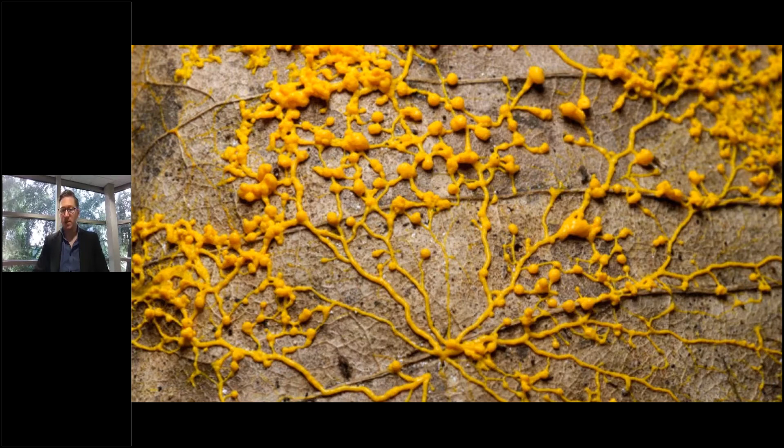Having been adapted to cities around the world and now offering the potential for mimicking regularly occurring events such as rush hour, this slime mold is a single cell organism which grows outward from a single point, searching for food sources along the way. Once these have been located, the many branches it has sent out die back, leaving only the most efficient routes between the food source nodes.

By arranging pieces of oatmeal on a petri dish to represent railway stations, researchers at the University of Hokkaido in Japan successfully grew a slime mold of the Tokyo railway system in 2010. Since then, the slime has mapped the optimum transportation networks for numerous cities. As the knowledge base grows and information is shared, this algorithm that was developed by using a slime mold, of all things, will help inform better decision making, not only across the United States, but also the world.

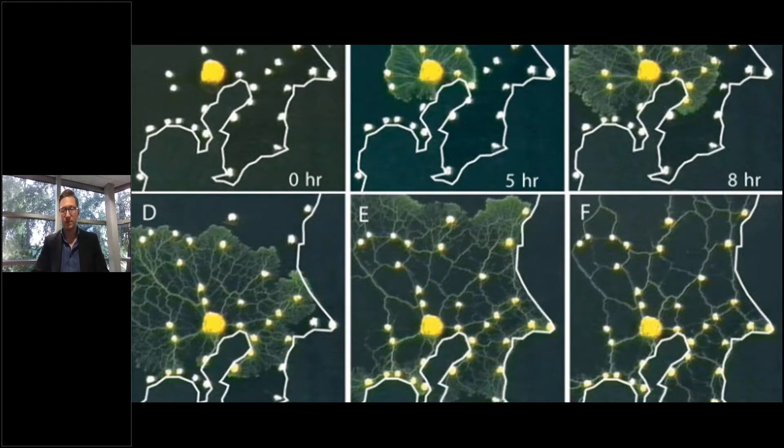Now, the second example I'd like to talk about is nature's ability to form symbiotic partnerships. Nature uses partnerships or relationships to vastly and often rapidly increase adaptability. One interesting example of this is sea crabs carrying sea urchins as they move.

This is mutually beneficial for both parties. The sea urchin benefits because they are oftentimes moved to new areas with higher density food sources, but from a crab's point of view, it's great to have friends who can protect you.

Most recently, this same sort of relationship can be seen in restaurants' ability to adapt to food delivery systems. An existing network of flexible delivery systems has helped local restaurants and shops connect with customers outside of downtowns, maintaining connections and continuing sales. The virtual network that made this happen is one thing, and is honestly something I can't even begin to understand. But the physical space that allows this to happen is something we can work to understand and design better.

A location where vehicles could quickly pick up a package for delivery and head out to its destination, possibly resulting in a more convenient rapid pickup location shared by multiple restaurants. How can further development of these symbiotic relationships inform solutions on the street that we can begin to implement?

The last example I'd like to reference is probably more relevant now than ever. Nature uses redundancies and diversity to harness adaptability in times of crisis. One of nature's best examples of this can be seen in the prairie ecosystem. The prairie ecosystem has a diversity of plant species that serve different functions in the ecosystem, such as nitrogen fixation, water retention, and soil stabilization.

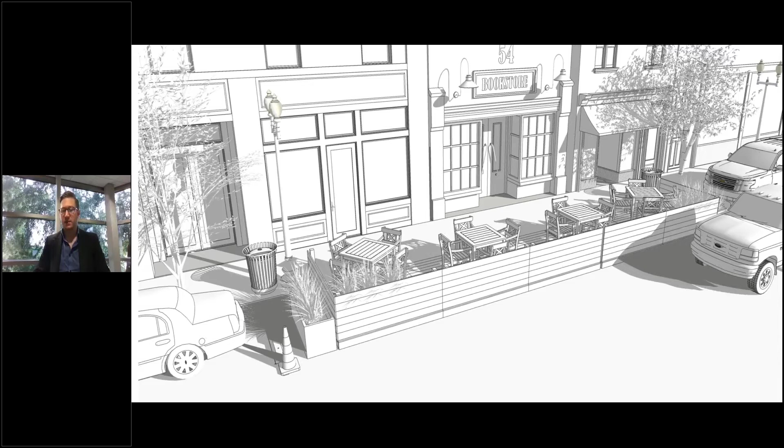We have over the last few months begun to devalue the single parking stall in favor of certain improvements. What we are seeing in many forms is the idea of a flexible zone, where certain adaptations are free to happen. As we begin to think about these adaptations currently happening and how we can evolve this idea, we begin to think about what alternate forms of installation we can look at. Outdoor dining is great, but how can we layer on uses?

Working with a local company here in Eau Claire, we are in the process of developing solar modules that function as outdoor seating, but have the potential to provide charging for electric vehicles, lights, potentially even climate control. This could also be replicated to outdoor workstations where you have multiple connections for power and convenient amenities such as lighting and climate control as well.

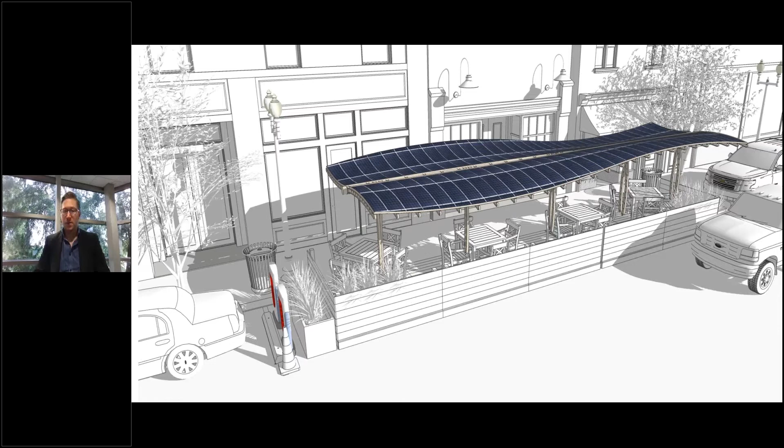We didn't stop there. We began to envision different forms of public spaces with hammock lounges, extended areas for shade to help reduce solar exposure, of course, and micro playgrounds. When we view this parking area with a different lens, the opportunities begin to surface and creative design has room to grow. How can we design in our streets the ability to adapt to times of crisis? How can we give our streets structured flexibility?

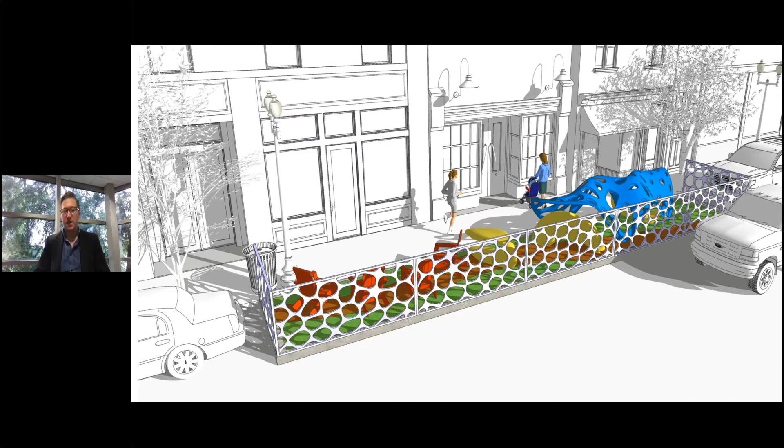Nature does not plan or try to be perfect. Nature adapts to solve problems in their environment. However, nature does learn from its successes. Positive reinforcement is a powerful thing. We need to never forget to stop and appreciate and learn from our current successes. But what can we learn from the change to help guide a more resilient and adaptable future? An adaptation where we can ensure that our communities have the tools and environment to not only survive, but thrive.

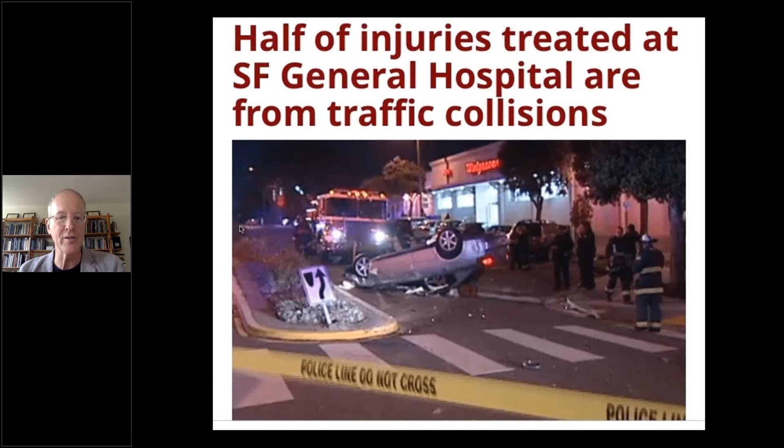Of course, we used to talk about crime when it came to safe streets. Now, speaking statistically and paying attention to what statistics tell us, it's really car crashes that are the principal cause of danger in our streets. And so that's what we're here to talk about.

Car crashes have declined and then kind of held steady - injuries and deaths from car crashes - over the years. But of course, we've been shocked to learn that pedestrian deaths have been rising steadily now for over a decade due to a number of factors we don't need to get into. Angie Schmitt talks about these in her new book, Right of Way. It's really become more and more dangerous to be a pedestrian in the US, and that's what I'm going to be focused on today.

One strategy, of course, is to blame the victim: try to walk defensively. Twitter has its fun with these issues, and wearing a bright outfit and making eye contact is all well and good. But really, there's a lot of things the pedestrian can't control, and I look at this picture and I'm reminded of a quote I recently read where DOTs are telling pedestrians it's really their responsibility to stay safe.

In fact, the principal responsibility for creating safety in the street falls to the street designer and the engineer, and it surrounds speed. A car moving twice as fast has four times the kinetic energy when it hits you, and a car going 35 is about 7 times as likely to kill you as a car going 25. So all the things we talk about when we talk about making streets safer have to do with speed. Well, not all of them, but it's really two things: speed, and protecting pedestrians and cyclists from vehicles.

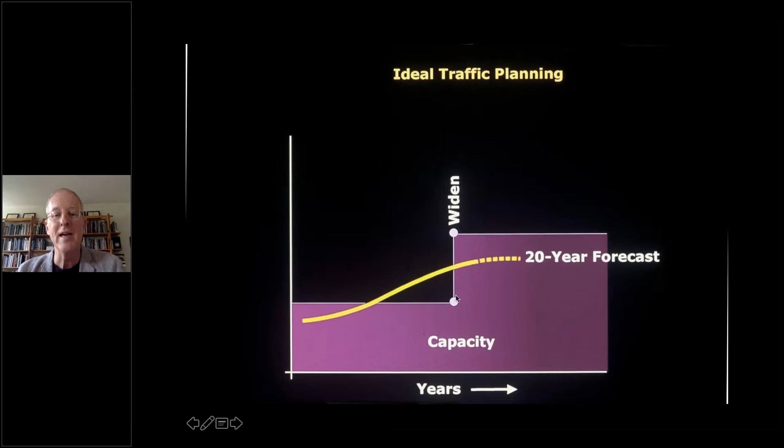And traffic studies presume what you see here, which is that you have a certain amount of capacity, you have a certain amount of trips in yellow. When the trips exceed the capacity, you get congestion, and you widen the street to absorb that congestion, and you no longer have a problem, which of course has never, ever happened.

And what we have in the US instead is what's called induced traffic, where there's a lot of trips that weren't being taken because the principal constraint to driving in congested places is congestion. And that's the operative sentence.

Now, if your city isn't congested, you might be able to increase some flow by widening a street. But in fact, if the street is congested, people who were not driving because of congestion, or who, for example in the American Midwest, typically were not commuting exactly during rush hour but perhaps a few minutes earlier or later, will change their behavior and the congestion comes back.

Today's engineers acknowledge, this is from Newsweek magazine maybe 15 years ago, today's engineers acknowledge that building new roads usually makes traffic worse. And I read this and jumped for joy, and then I landed and said, well, wait a minute, I'm doing 3 different projects where that isn't acknowledged.

And it's very typical that people will agree that induced demand happens, but in their day-to-day activity as a city planner or as an engineer, will ignore that knowledge.

Here's the study. It was presented at the London School of Economics, very straightforward. Actually, I have no idea what this means, but I do know what the conclusion means, which is that for every amount of new capacity that you add to a congested system, it will be 40% absorbed immediately, and within 4 years, on average, it will all be absorbed by new trips that it generates. Or sometimes it will be absorbed immediately by new trips, like the $1 billion expansion of the 405 freeway in LA.

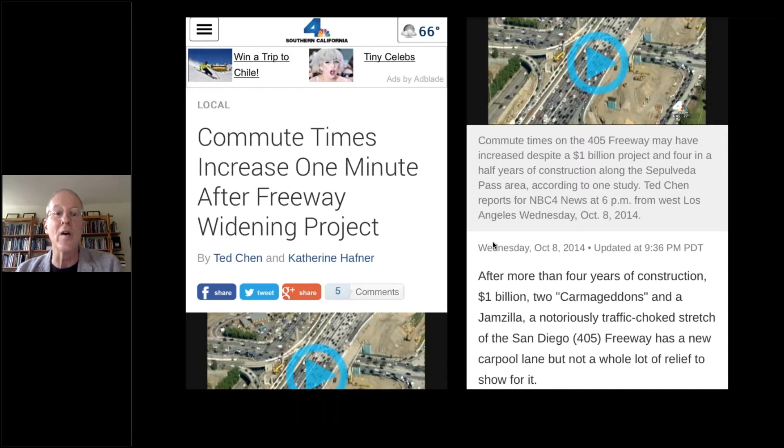I share this discussion wherever I go because it just bothers me so much that people ignore it. But then I usually move on because it's a hard argument to win. And I ask a different question instead, which is, let's look at your downtown streets and see if you have some streets that aren't congested, if you have streets that have more lanes than they need.

Obviously, the more lanes you've got, the faster cars go, the further pedestrians have to cross, the more opportunities there are for lane switching conflicts.

This was Oklahoma City, which about 10 years ago, Prevention Magazine named the least pedestrian-friendly city in America. In fact, the worst city for pedestrians in the entire country was Oklahoma City. And the mayor came to me and said, what do we do?

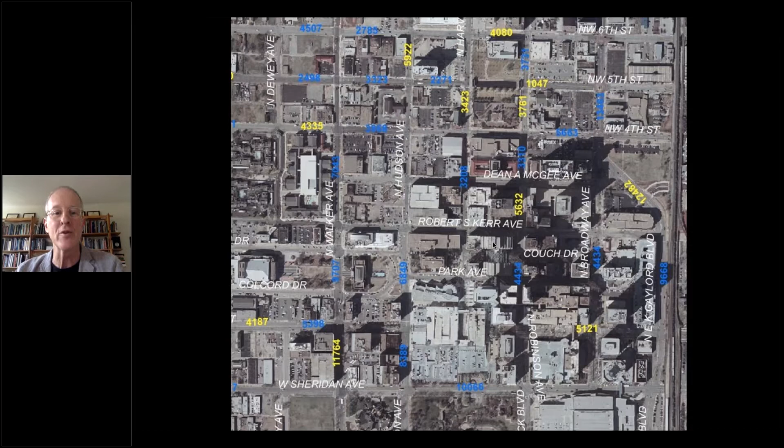I said, let's look at your car counts and your number of lanes. We know that a 2-lane road will handle 10,000 cars per day without turn lanes. These were the car counts in downtown Oklahoma City, and these were all designated to be 4-lane, 5-lane, 6-lane streets with these minuscule car counts.

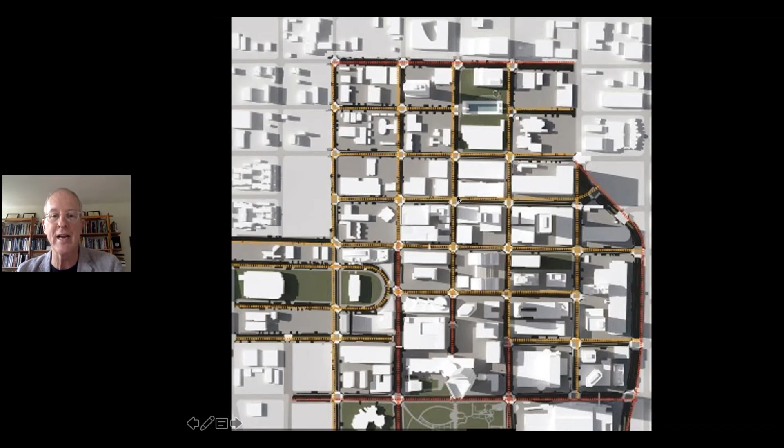So we did a plan. Coincidentally, this new building at the south here, Devon Tower, was about to land, generating $200 million in tax increment. And we decided to spend that money rebuilding all the streets in the 40 block downtown core.

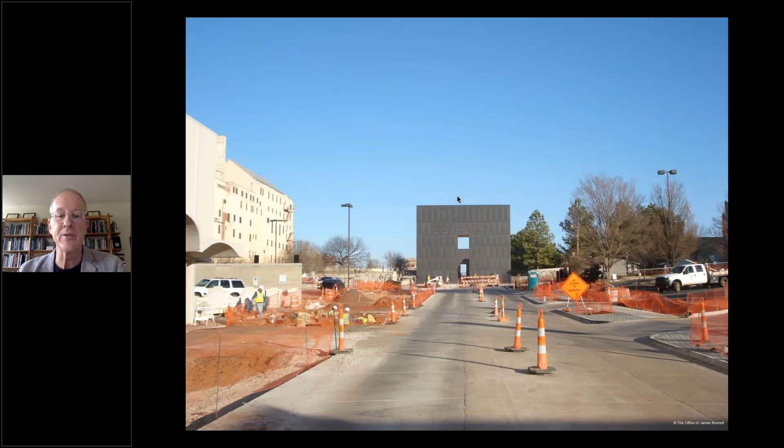My job was to design the curb to curb. A typical street went from this to this. We right-sized them for the amount of traffic they had. Here it is under construction, not congestion. Here's another street, Sheridan, through the heart of downtown, became this.

This is what you do if you have money. I always say, if you've got 200 million to spend, rebuild. If you don't, you can restripe a whole downtown for the price of rebuilding just a few streets. That's more the strategy we've been using in lots of other cities.

Here's something you may have seen before. It's called the Classic American Road Diet. If your city has 4-lane roads, these are inherently extraordinarily dangerous. The Classic American Road Diet turns a 4-lane road into a 3-lane road. We've been doing these all over the country.

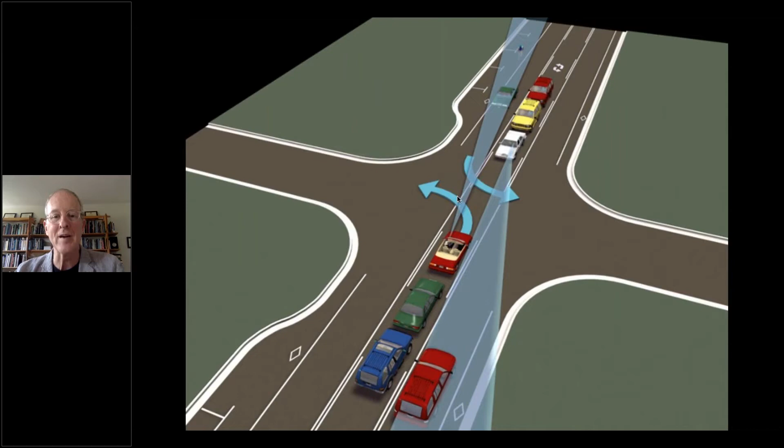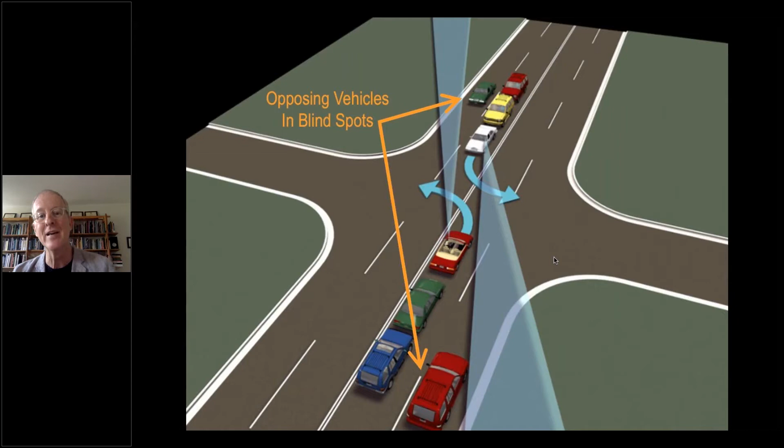Jeff, you're breaking up just a little bit there. I just wanted to bring that to your attention so you could increase some bandwidth if you have that ability on your end. Great, I'm going to turn off my camera. Hang on for a second and wait for one second more. Can you hear me all right? Yes, I can hear you now, Jeff. Great, thank you.

So one-way streets, I won't repeat, but they're inherently dangerous, principally because whatever lane you're in, the other lane is faster. And you have this opportunity when there's multiple lanes in one direction to jockey. So there's the story of Vancouver, Washington, which famously brought its one-way downtown back to life by making it 2-way, which was, of course, a long time battle with the state DOT, and we often have to work with and against DOTs to accomplish these.

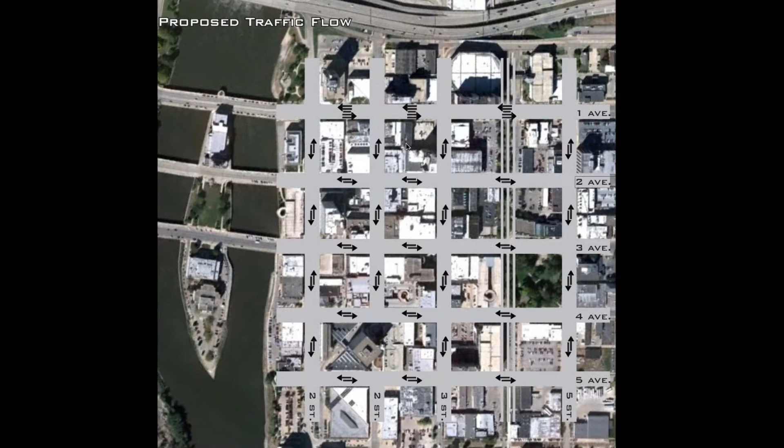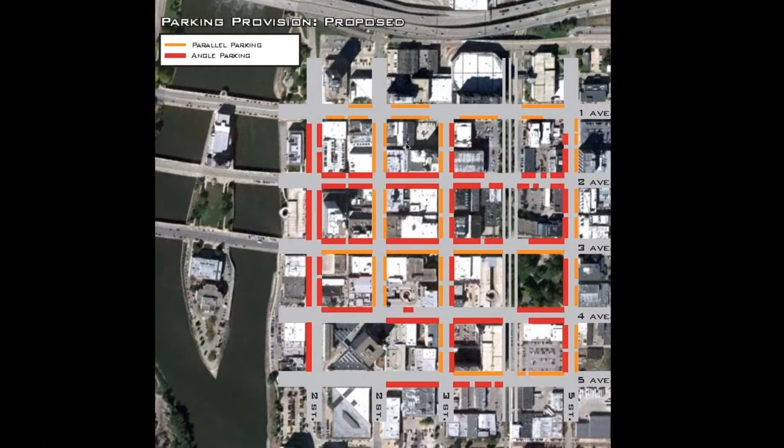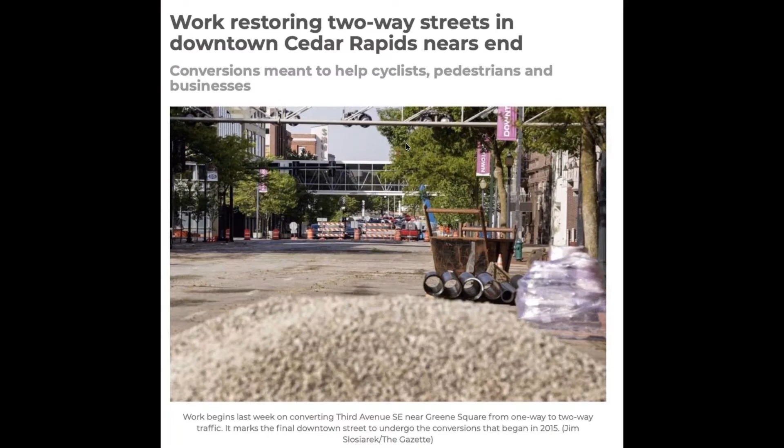And written about, the downtown core is the part you see here. You can see where the conversions occurred. Here's a typical street before and after.

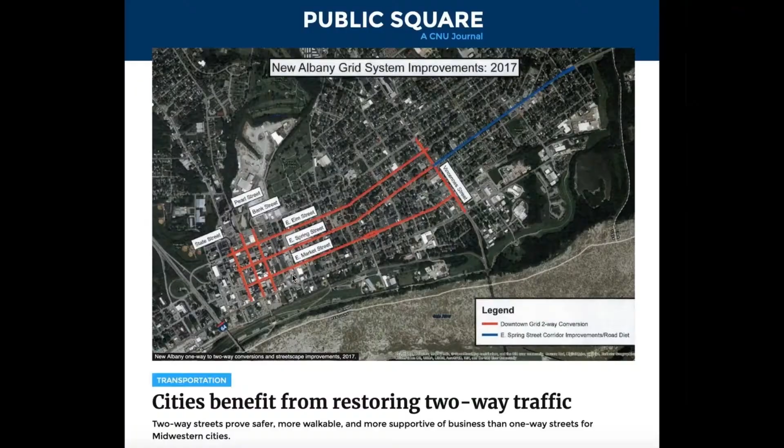This guy over here on the left is still learning how to use a parking space next to a protected bike lane. Wonderfully covered in a great publication called Public Square, which will be represented by the next speaker, who you will enjoy immensely, Rob Steuteville.

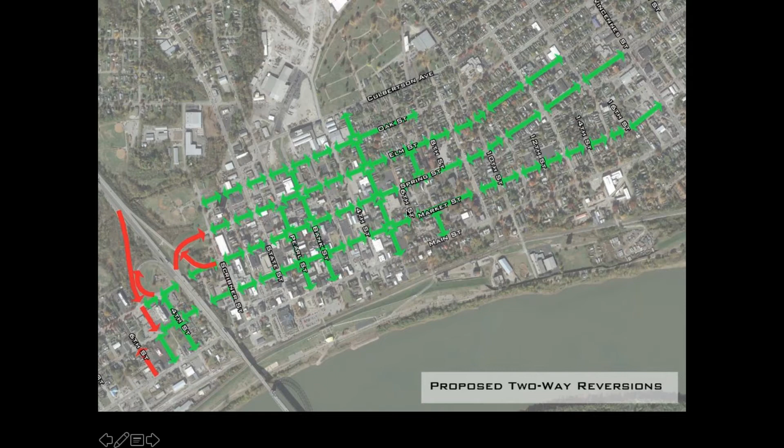He also covered in this article what we did in New Albany, Indiana, across the river from Louisville, where we designed the two-waying of all these streets. In fact, the neighbors had to fight for it. It took 3 years, and they did them all in one summer. According to the police chief, he's never seen a better scenario for public safety. So that's a big help.

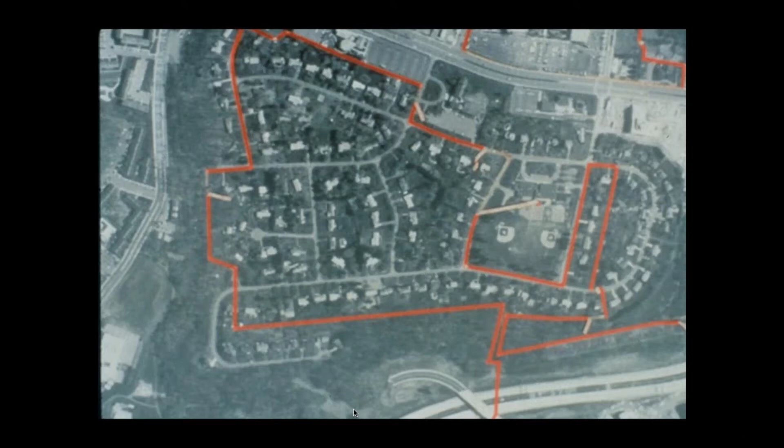The width of the streets next. The typical street in America has gotten wider and wider over the years, from 1960 to 1980, same height of airplane, different subdivisions. You see how the standards have shifted, such that in my old neighborhood in Miami, we had to lose half our sidewalk because the street wasn't draining properly, and they rebuilt it to the new standard. Wider streets, people go faster.

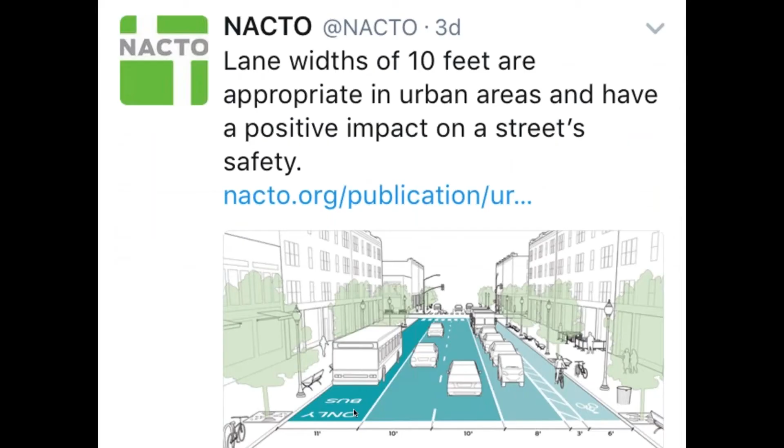We have the data. NACTO has now identified that the standard 10-foot lane for an urban, busy, mixed-use through street is the standard again. Many cities have slipped to 11 and 12 over the years, and we're now going back to 10, which is much safer.

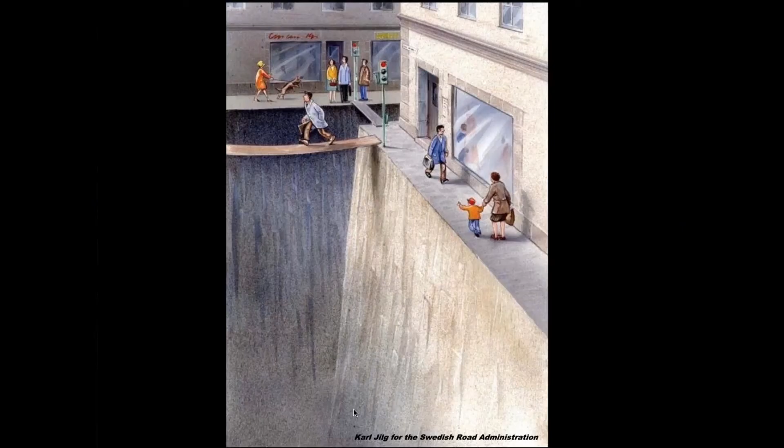This is an artist's interpretation of how a street feels without the parallel parking, without the street trees. Little details like corner curb radii that cause cars to stop before they turn or not, and cause pedestrians to walk vast distances across intersections or not.

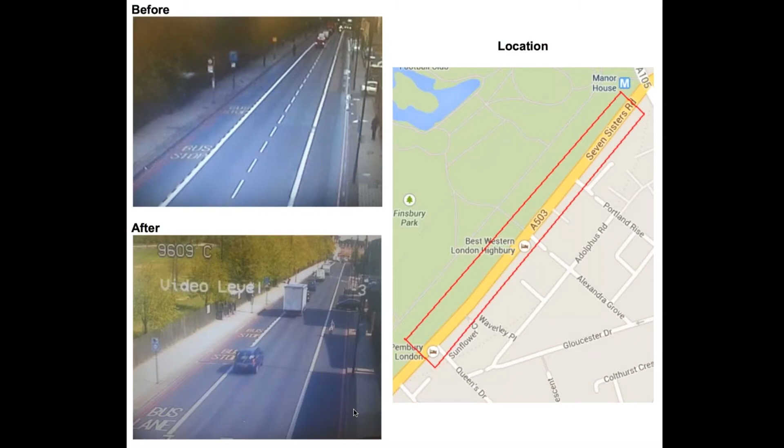And then recently discovered in England, but now we're applying it here in the US: when you remove the center line from a two-way street, the fear that evokes in drivers—that they're perhaps not driving in the right part of the street, whether it's the left side or the right, depending on where you are—causes speeds to drop an average of 7 miles an hour. So that's a trick we're applying to many streets, removing the center lines.

Signals make intersections more dangerous than all-way stop signs. In Philadelphia, signals were removed and replaced by all-way stop signs on 472 intersections. We collected data on 199 of them. Crashes dropped, injury crashes dropped, and severe pedestrian injury crashes dropped by more than two-thirds. The engineers there believe that it's only in Philadelphia where people speed up at yellow lights.

But what's important to understand about a stop sign is that no one ever legally goes through it at any speed, right? And of course, everyone sees everyone else—there's eye contact being made. Wheelchairs are safer, bikes are safer.

So for the right kind of intersection, many cities have signals when they shouldn't. They should have four-way stops instead. And when I work in a city, we typically turn a lot of signals back into stop signs.

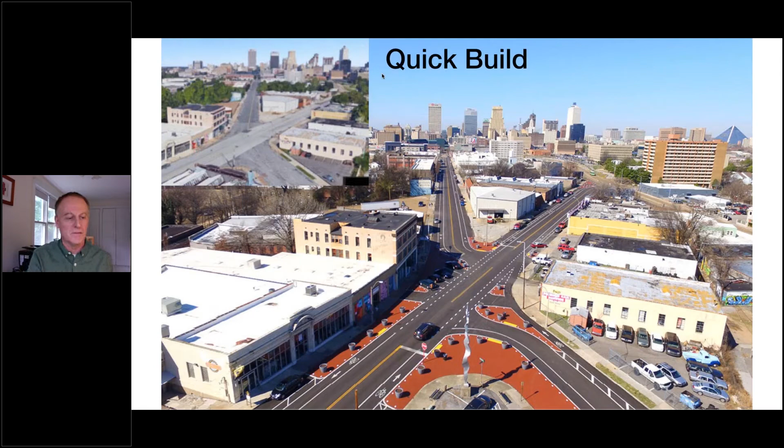The quick build is a semi-permanent methodology. The projects tend to last, or are expected to last, 5 to 8 years, maybe 10. So it's a trade-off of longevity for immediate impact.

The process is quick because the pavement doesn't change. There's no stormwater impact, there's no topographical survey. The engineers and designers who are implementing these changes are learning a great deal about materials—which ones last the longest, and which ones can last through the weather and the seasons.

You can adjust these projects if they're not working out as planned, or even change them according to seasons. In Burlington, Vermont, a snowy place, they're using this quick build approach, and some materials like planters or bollards can be stored in the winter and reinstalled in the spring.

You can also implement quick build with a routine maintenance schedule, which allows you to apply new coatings and new designs to surfaces when streets are repaved.

Now I'm going to talk about a more permanent framework for changing streets. I call this the Florida model, and state DOTs have a huge impact on streets. Many of the complete streets projects depend on state funding, so it's really important that states understand and support complete streets. Florida DOT has created a framework and a model for building context-sensitive and walkable streets that other states may want to emulate.

You may be thinking, doesn't Florida have the most deadly streets for pedestrians in the US? And yes, it does. So why should we look to Florida for inspiration? If this new system can work to transform the thoroughfares in Florida, it can work anywhere, and it responds to context.

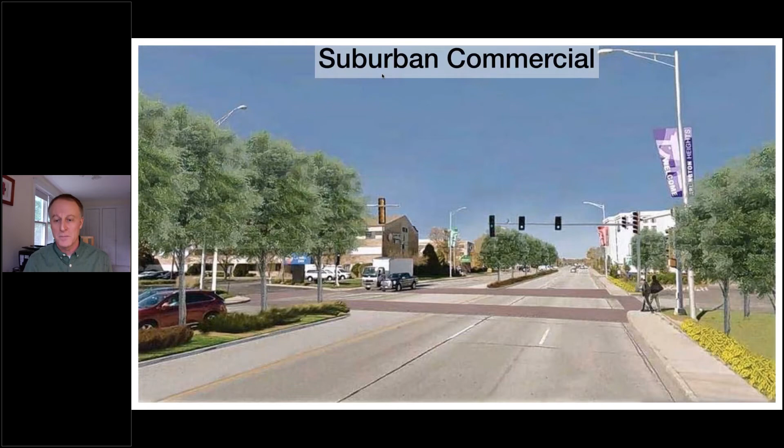This model calls for different designs according to context, such as urban core, urban center like a main street, urban general which is an urban neighborhood, suburban commercial, suburban residential, rural town, rural, and natural. So these 8 context zones cover the entire state, and they represent a new, common sense approach to street design for a state Department of Transportation.

Of the 8 context zones, 4 of them are walkable, which is 4 more than the DOT used to acknowledge. The first 3 are in cities, and the 4th is rural town, which is really an urban, walkable urban place. But rural towns don't like to be called urban, so they named it something that did not include the word urban in it.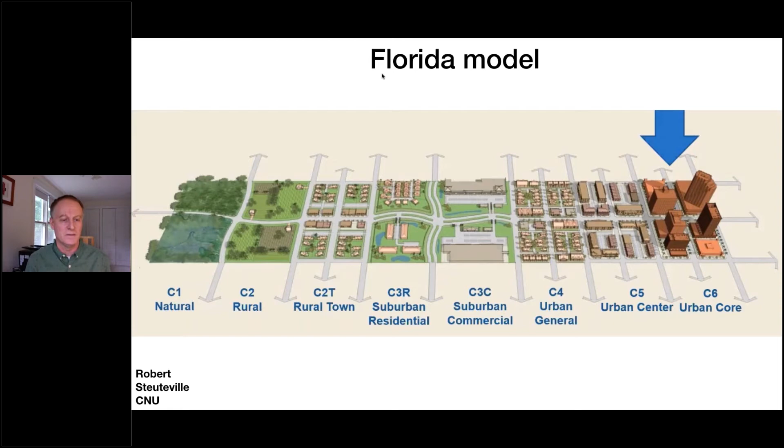So it's about building the right street at the right place, according to Billy Hattaway, who is currently the transportation director with the city of Orlando, but he was with the state DOT and he spearheaded this new context-sensitive approach. A direct result of reform is to change target design speeds.

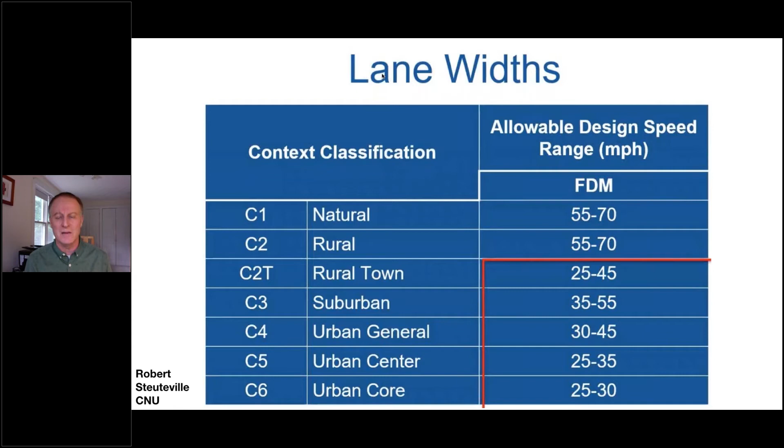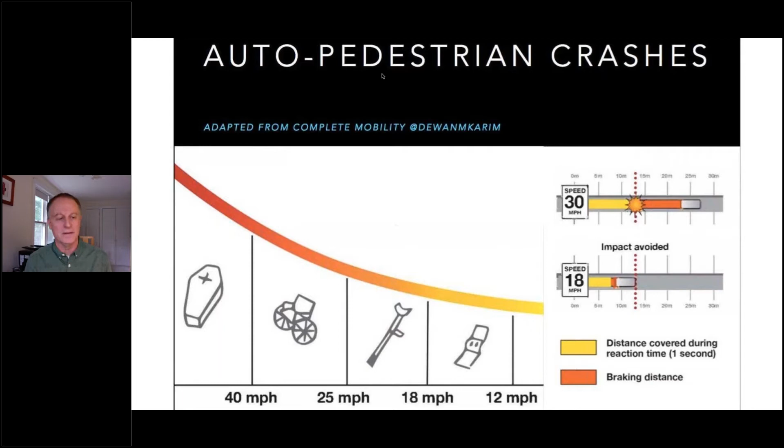Minimum design speeds, regardless of context, were previously 40 miles an hour. In 5 of the 7 context zones, Florida now allows lower design speeds. Reduced speeds in walkable context zones have a big impact on health and safety because fatalities and long-term injuries rise rapidly in car-pedestrian crashes above 20 miles an hour.

The system not only allows the state to design roads according to current context, but it allows for thoroughfares to be designed according to a future context that is planned. This is now a suburban rural area, but it is planned as an urban center. It's in Woodville, Florida. You really can't create an urban center without changing the infrastructure first, or at least concurrently with the development. You can't do the development first and the infrastructure later—that doesn't usually work out so well.

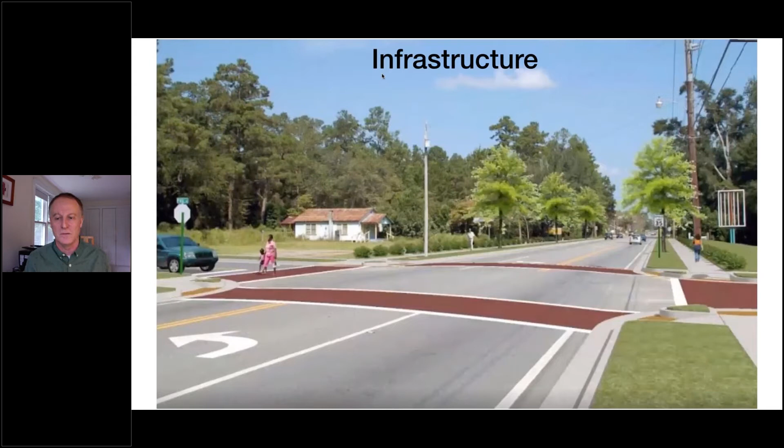So this is what it looks like if you just change the infrastructure and put in some walkable facilities. And if you put in the buildings and on-street parking, this is what it looks like. So the Florida model is the kind of theoretical framework change that we need in our major transportation institutions, based on proven design models that have worked for a long time, regardless of technology.

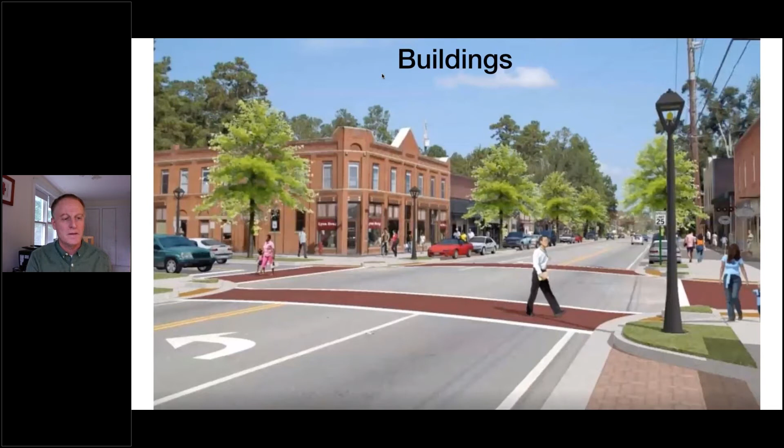Now I'm going to talk about the importance of suburban retrofit. And I'm going to take everybody out of the silo of streets for a couple of minutes, because it's important to see the wider context for complete streets.

But regardless of the short-term demand, there is a very important reason to pursue suburban retrofit in the long term. If you're not familiar with Chris Nelson at the University of Arizona, he's an eminent housing researcher—you should be. His research shows a huge mismatch between the housing we have and the housing we need all across the US in the next two decades.

This mismatch is due to changing demographics and preference, which don't line up with what was built in the last half of the 20th century, really up to 2008. And of course, street designers were a major driver of what was built during that time period. I won't go into details, but the bottom line is that we have way too many large-lot single-family houses, to the tune of tens of millions of units, and too few of the urban housing types.

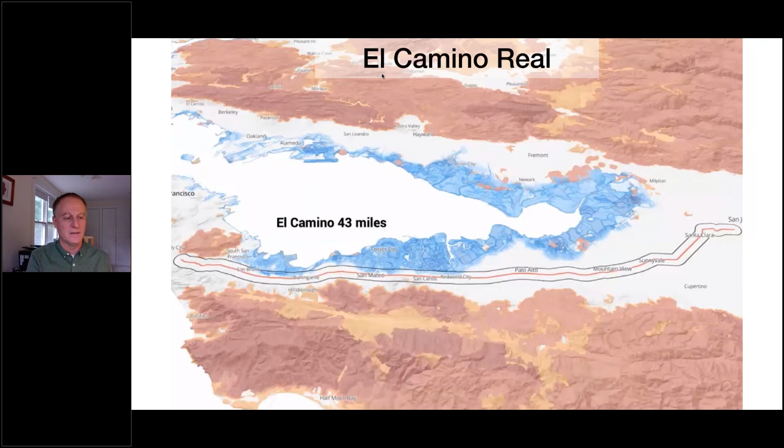If you take that right-of-way and reallocate it, you can fit that same six lanes of traffic plus bus rapid transit and generous bike lanes and sidewalks. The land adjacent to the right-of-way is also inefficiently used, and by looking parcel by parcel, they determined the thoroughfare could accommodate 250,000 new housing units of the kind that are needed, according to the Nelson analysis, including 50,000 affordable units on a single thoroughfare, with the right kind of transportation engineering and zoning changes.

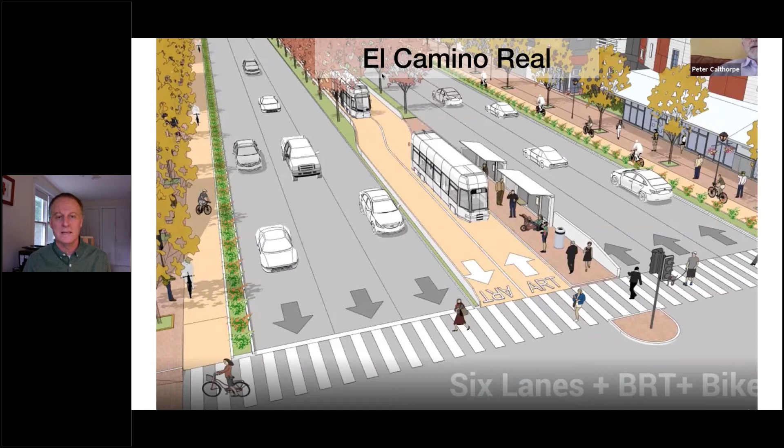We have these kinds of thoroughfares in every metro area across America, and they could serve a similar purpose in the future. The next case study is in Colorado, a city called Westminster, that's virtually all conventional suburban in form. Their downtown has a mall, and the mall failed. So currently under construction, due to the city's planning, is a mixed-use downtown on the site of the failed mall, and the development is going like gangbusters even today.

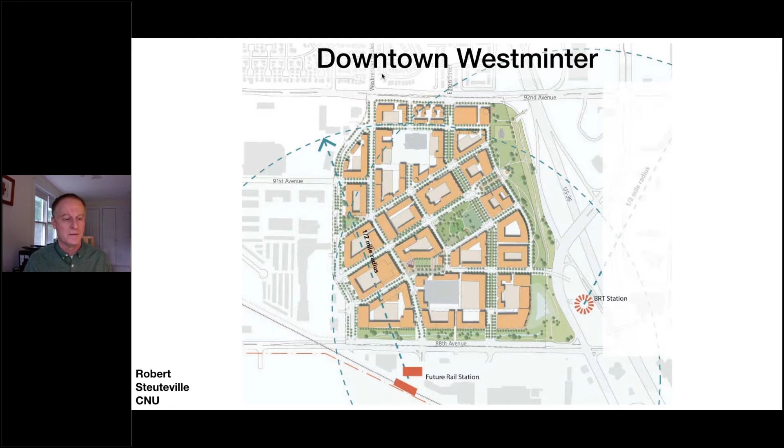And here's the street network that is being built on the former mall site. And here's a rendering of one of the thoroughfares on the site. It's starting to look something like this. This is another complete street.

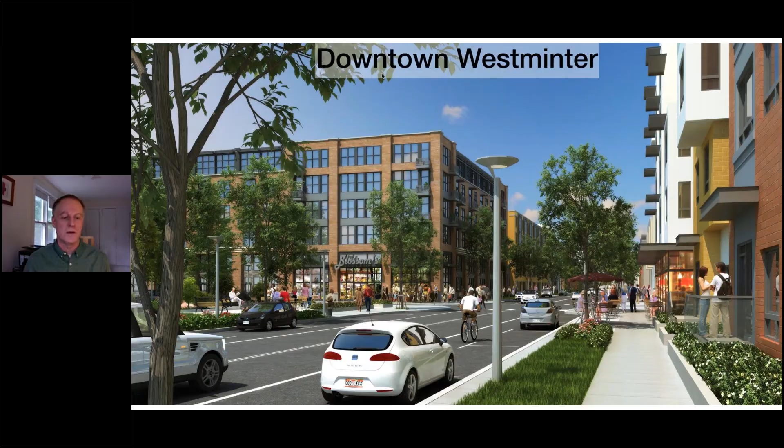The point is that transportation planning and engineering are critical to making this happen. In a couple of decades in the 20th century, the transportation industry built 47,000 miles of interstate highway. Now the challenges are different, but one of those challenges is complete streets, and we need the entire toolbox to build them. We need to think small and incremental with tools like Quick Build, and we need to think big, like a new vision for arterial thoroughfares and for shopping malls that die. And we need new theoretical frameworks like the Florida model for how transportation institutions operate. So that's it for my presentation. Thanks for listening.

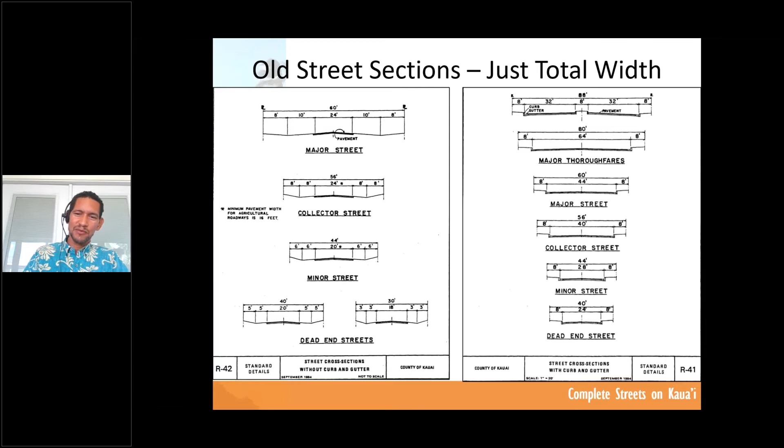We're going to see some examples of what happened with that and what we're doing to change it. This is one sample of our new street sections, following on what you heard from Jeff and Rob. We asked, what do we need on a certain type of street? This is a neighborhood connector, one type of street, and in these situations we might need bike lanes. We will need parking in a neighborhood connector.

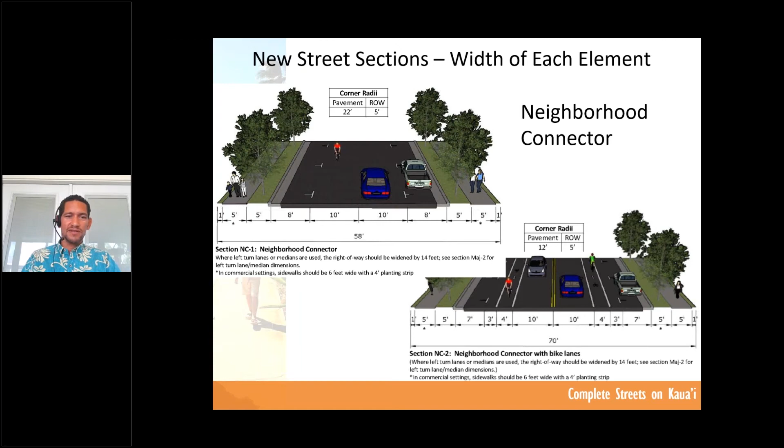This is more like a neighborhood business district. We'll need sidewalks, typically with businesses or residences or both on the sides of these streets. So we show how to fit all of these things into a cross section. Now we have not just 'here's how wide your street is,' but what we should have inside those street widths. The other thing we did in our design manual is keep it very simple.

Jeff talked about other documents like the NACTO Urban Street Design Guide and other geometric design documents about how sharp your curve should be for certain speeds. Those are all good documents if used appropriately, even ones like the AASHTO Green Book that gets criticized so often with respect to complete streets. If used appropriately, with the right design vehicles and design speeds, it can work well for designing streets, along with other documents like NACTO.

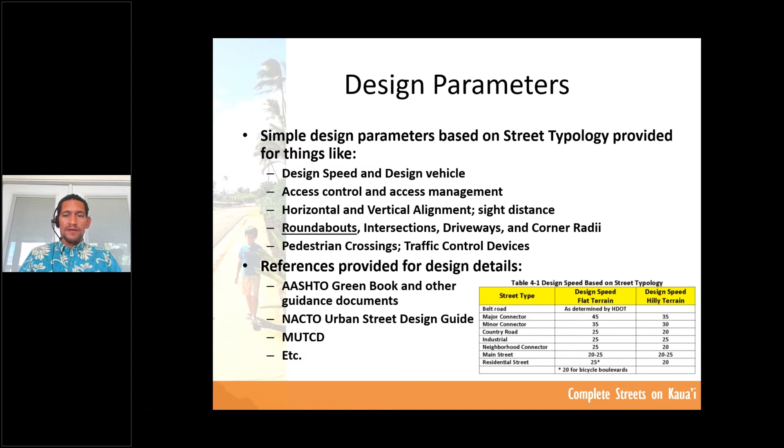So based on each type of street, we picked the design vehicles, and talked about standards and ideas for when we'd want roundabouts versus other types of intersections, what our pedestrian crossings look like, how our traffic control devices look—just basic parameters—and then we reference the other design detail documents.

Now I'm going to go into our projects and some of the ways we've implemented complete streets here on Kauai. This is what we're calling our lighter, quicker, cheaper approach, similar to what Rob talked about with quick build—doing very quick restripe situations, or bolt-down as opposed to concrete. I'll give you a few examples of these types of projects.

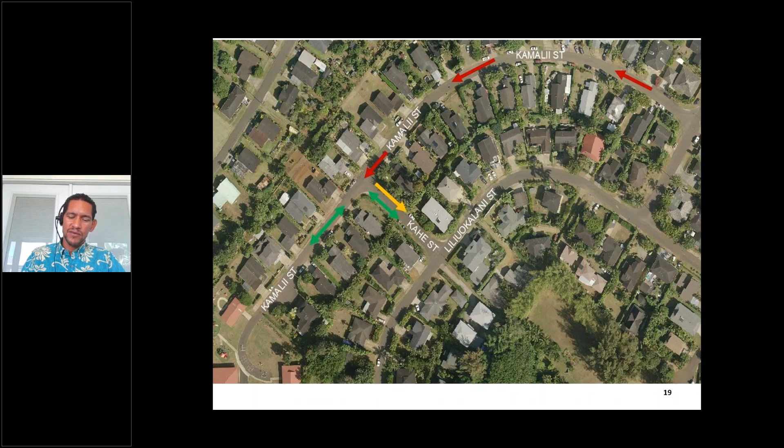So for the one long curved block of the street, we said we're going to create a shared use path, effectively a lane, for biking and walking, and make the street one way for motor vehicles. It also helps with the pickup and drop off activity that sometimes takes place at the back of the school.

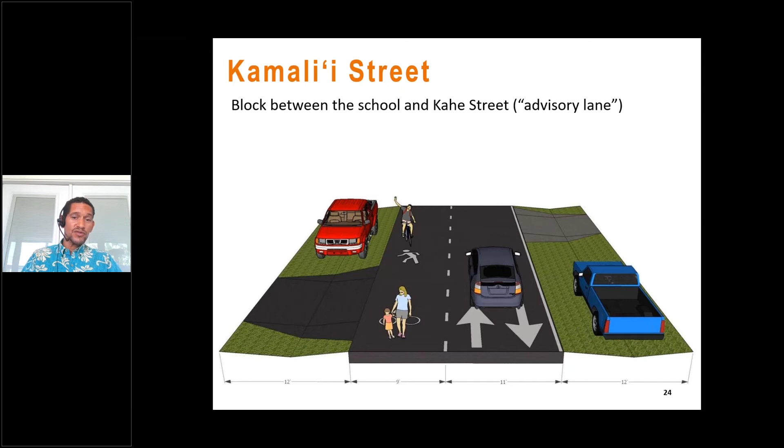One segment, we used this advisory lane concept that Jeff talked about, where cars use just one lane and move into the pedestrian lane when they see a vehicle, pedestrian, or bicyclist in that space. They move out of the way, yielding to pedestrians and bicyclists. Here's an example of that - it's a dead-end portion of the street, not used very much during school pickup and drop-off but used some, and it works well for people walking and biking.

Now I'm going to talk about our main shopping center area in Lihue - these typical 4-lane to 3-lane road diets. These are areas built as major streets, as I talked about earlier, using old standards with nothing but 44 feet shown in the road width. So they simply marked them as 4 lanes because there was enough room when they designed these. This is a typical suburban shopping area built in the 80s and 90s, and we're trying to work our way out of that. The traffic volumes max out at only 8,000 vehicles per day, so it's an easy opportunity for restriping.

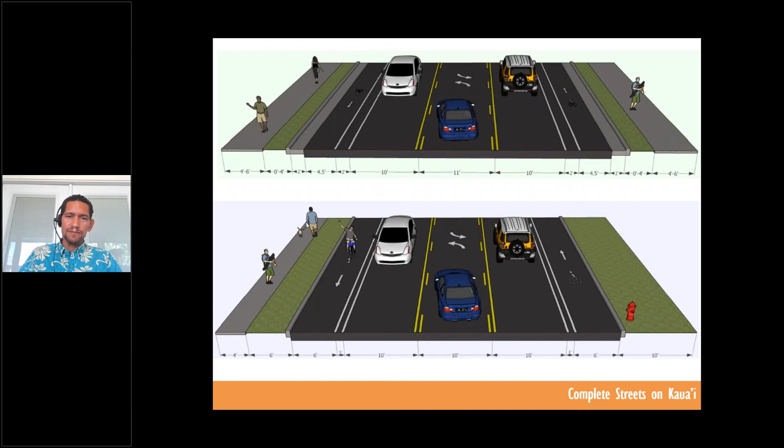We haven't fully implemented this. We're taking opportunities to do this, as Rob was talking about, during maintenance activities, resurfacing, or when development occurs.

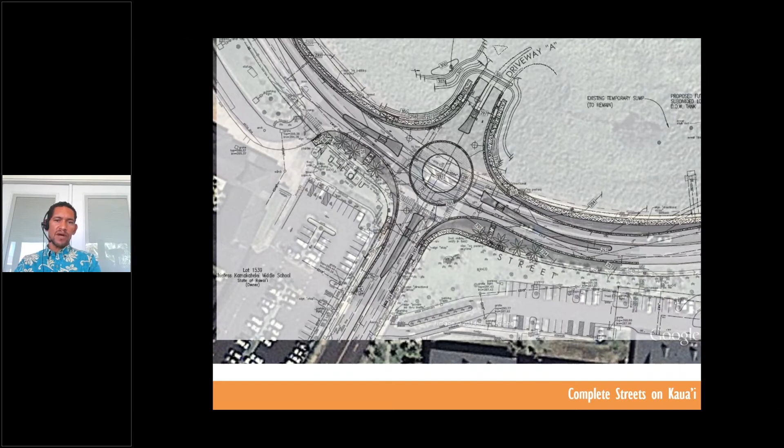This intersection here is a 3-way intersection that was one of the most unsafe intersections, temporarily made into a four-way stop, which improved safety but created more congestion. When development occurred on the upper side of the screen, this roundabout was designed and dropped in, and this is that roundabout. This is directly adjacent to a school site right here - a middle school - and kids can now walk and bike to school in a much more friendly way. There are wide sidewalks on some of the major roads that approach this too.

Another area, down at the bottom side of Nuhou Street, had 4 lanes converted to the 3-lane configuration with buffered bike lanes. We're going to be doing the rest of the streets as we pave those streets in the very near future.

Now I want to talk about some road retrofits and reconstruction projects. Hardy Street was an $8 million federal aid project serving businesses, residences, the elementary school, convention hall, and the civic center. We added bike lanes, sidewalks, better crossings, and a roundabout. One thing we learned on this project - it was started about 6 or 7 years ago before I arrived here - we didn't scope fully resurfacing Hardy Street as part of the project. We learned from that, and I'll talk about that at the end of my presentation.

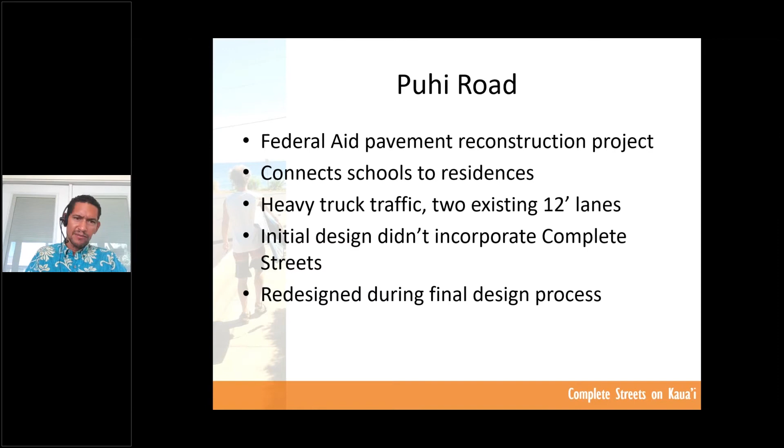The initial design didn't incorporate complete streets principles at all, so we redesigned it during the final design process. Here was the original section: they said, okay, we're just gonna strengthen the road, build this thick concrete section and put in these 8-foot asphalt shoulders. The problem with this design is that it doesn't include anything for walking, although people could certainly bicycle on the shoulders, and it didn't make any way to easily retrofit it after the fact.

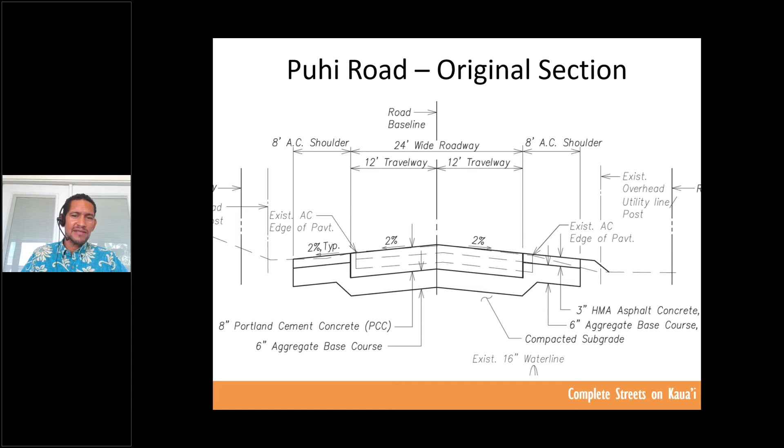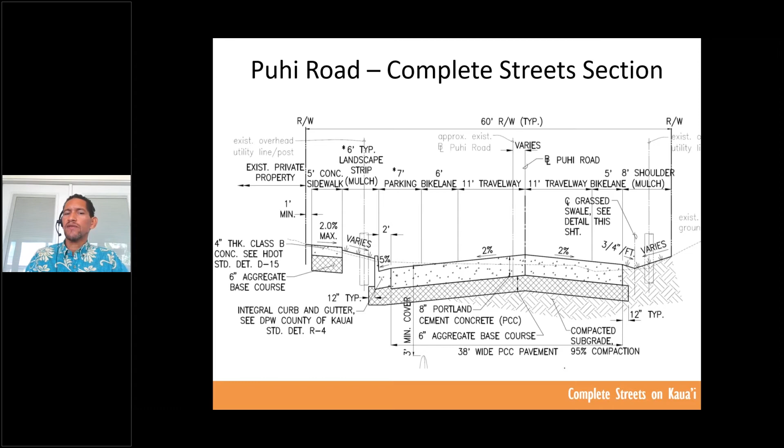So we came up with a section that actually narrows things, narrows the travel lanes. We left them at 11-foot travel lanes because of the heavy truck use. We didn't use buffered or protected bike lanes in this case because of the context of the road and the width available. But we showed a sidewalk here, and we weren't sure we even had the funds to do this—we had to find more funds to add the sidewalk.

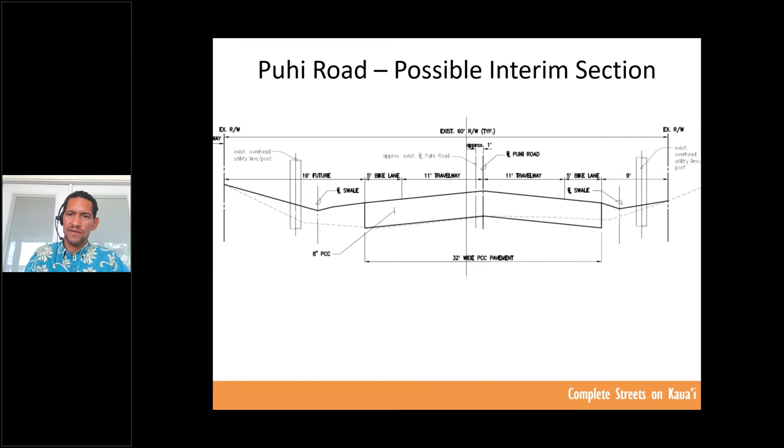So we came up with an alternative section that doesn't include the sidewalk, but at least would allow us to add that sidewalk on the left side of the sections you saw in the last picture in the near future. And here's what that looks like in a more presentable version to the public.

Next project I'm going to talk about is a big reconstruction project, a resurfacing project. It's the original Kauai Belt Road, unchanged since the 1960s. 10,000 vehicles per day—it's rural, so it doesn't incorporate sidewalks and really wouldn't given the context, but there are some residences. So having at least some paved shoulders at this volume is pretty important. We added paved shoulders and a roundabout to this project that was otherwise just funded by resurfacing funds.

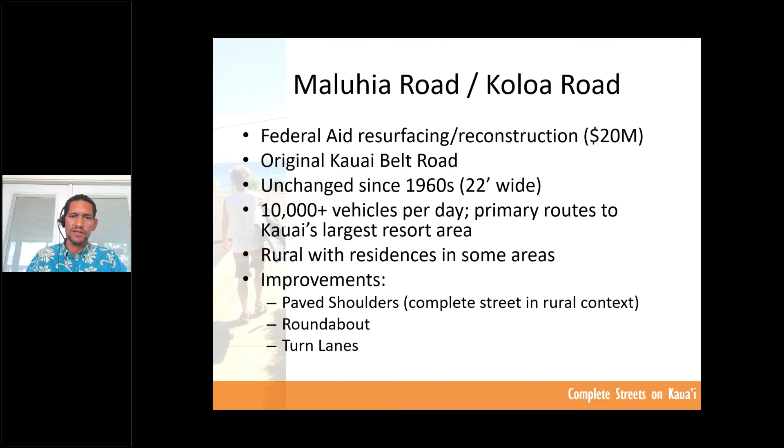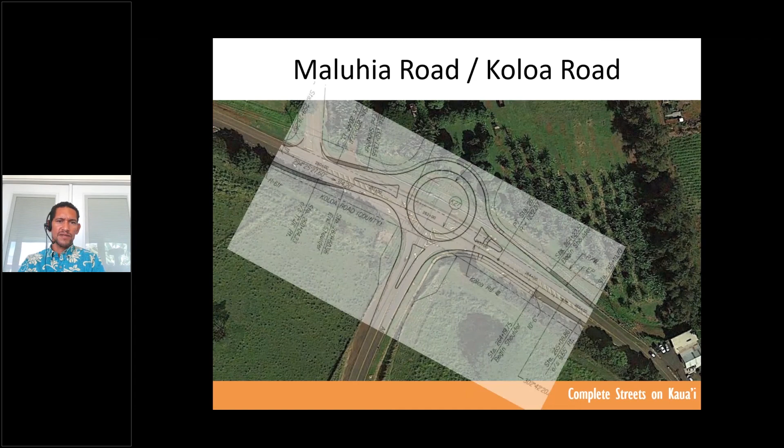Next project, our Lihue Town Core Mobility and Revitalization Project, a $17 million project with a $15 million TIGER grant. Land use was approved first. Main focus was Rice Street, another road diet, converting 4 lanes to 3, plus other components I'll talk about. This Rice Street 4-lane road was sadly built only in 2002, when other places were already doing road diets, but Kauai was going in the wrong direction. We've now converted that.

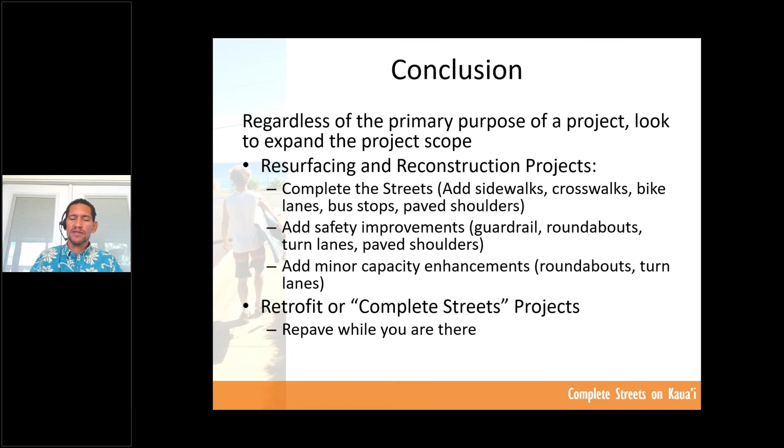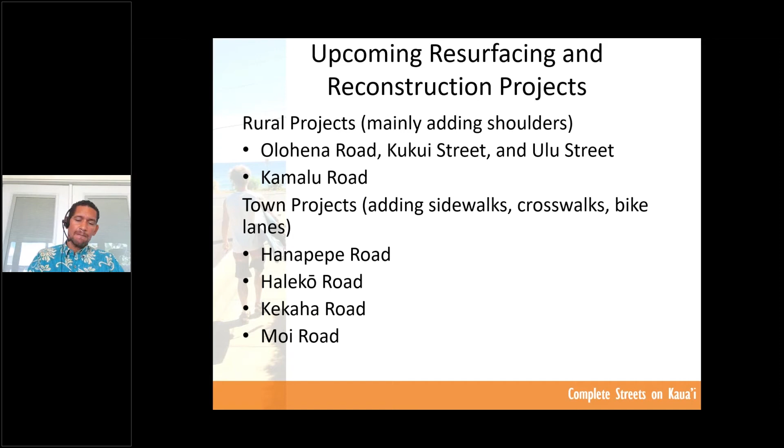And that's what's really been successful for our system. Here's just a few other projects where we're doing resurfacing and reconstruction. The top two projects are just like the one I mentioned, we're just adding shoulders because that's what's needed in those rural settings. And in the town project where we're resurfacing, we're going to be adding things like bike lanes, sidewalks, crosswalks, and in some cases roundabouts. And lastly, upcoming complete streets and retrofit projects, these are funded or intended to be primarily complete streets projects, and again we'll be including resurfacing along with those.